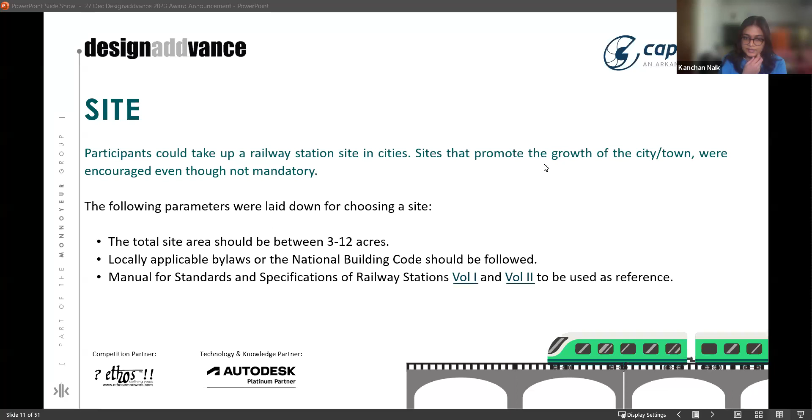The sites were supposed to be between 3 to 12 acres, and they had to follow locally applicable bylaws and the national building code. We had also suggested following the railway station's manual of standards and specifications, volume 1 and volume 2, as reference.

The eligibility for this competition was open to all undergraduate and postgraduate students of architecture, planning, engineering, and design. Even graduates from 2023 were eligible to participate. Many of you participated in teams of 3, some in pairs, and many students also took up the brief individually.

There were many workshops and lectures conducted for the participants free of cost online, which included lectures by experts in the field, whether it be software or design strategies, and case studies shown to students for inspiration.

There was also a lot of social media engagement. If you follow the handles at the rate Cape Tech or at the rate Ethos Empowers, many of these covers might already be identifiable to you. Some were value posts where we tried to tell you unique features you could add to your designs, or how transit-oriented development is practiced around the world, along with many short case studies to enhance your designs.

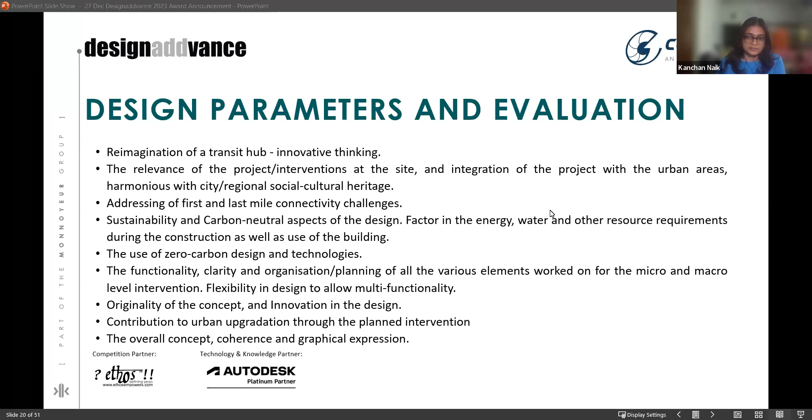These are our top 12 finalists, and we are as excited as you are to see who has made it to the top 5.

We'd like to especially mention the colleges who adopted the brief as a studio project, meaning they made it part of their academic curriculum in one of the most relevant semesters. We had around 12 colleges from different states and cities, including Birla Institute of Technology Mesra, IIT Kharagpur in their PG planning program, MES Pillai College of Architecture Panvel, NIT Hamirpur, NIT Raipur, and NIT Rourkela. We also had Sri University Cuttack, Rathinam School of Architecture Coimbatore, SRM Chennai, Thiagarajar College of Architecture Madurai, University Institute of Architecture Chandigarh, and VSSUT Burla take up the brief in their studios. We are really thankful to the teachers and HODs for showing interest in Design Advance and responsibly mentoring this program within their colleges.

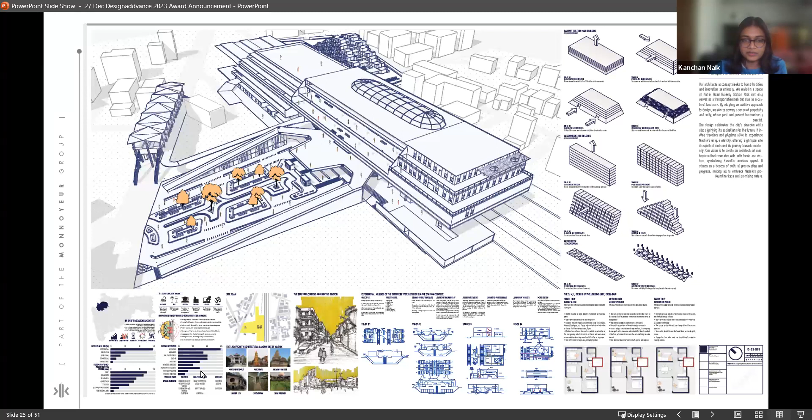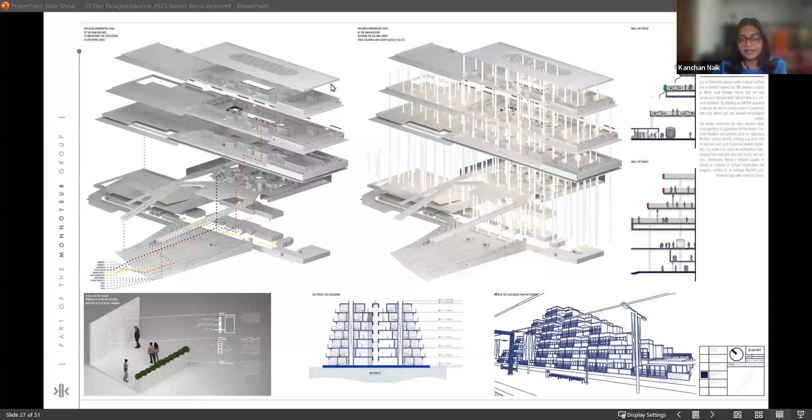Congratulations and many best wishes to this team. As you might have already heard, so many teams from Pillai College of Architecture have made it into the top 12. Congratulations to Kundan, Faisal and Nikhil for making it into the top 5. Congratulations again.

Now we move on to, we, yes, have Faisal from the team here. Okay. Hi. Can we allow them to talk? Yes, yes, Faisal.

Hi, hi. Actually, I have Nikhil here with me as well. Oh hi, that's great, ma'am. Congratulations, good work. Thank you, sir. Thank you so much. So would you like to say something?

Nothing. It's been a great journey overall. All the redos and everything else that we got in college, everything has finally paid off, and the immense amount of analysis and sketching, everything just feels worth it. I would like to really thank Capricorn, Ethos, Empowers, Design Advance for giving us this opportunity.

It's been really amazing, and we look forward to the next edition. Thank you so much, all the jurors, for being fair and for really giving importance to our design process. It's been really amazing. Thank you so much.

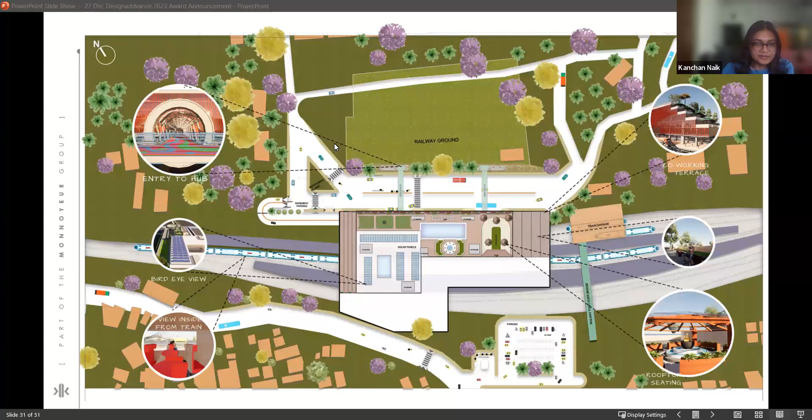There are co-working terraces, there is seating on the roof, there's the entry to the hub. Next slide, please.

You can see the scheme in detail here. Each and every layer has been explained thoroughly. They've very nicely and diligently broken down each function and resolved it to a great extent. They've also explained all the entries, the exits, the main focal points where people get in and get out, and what kind of urban design features they have incorporated.

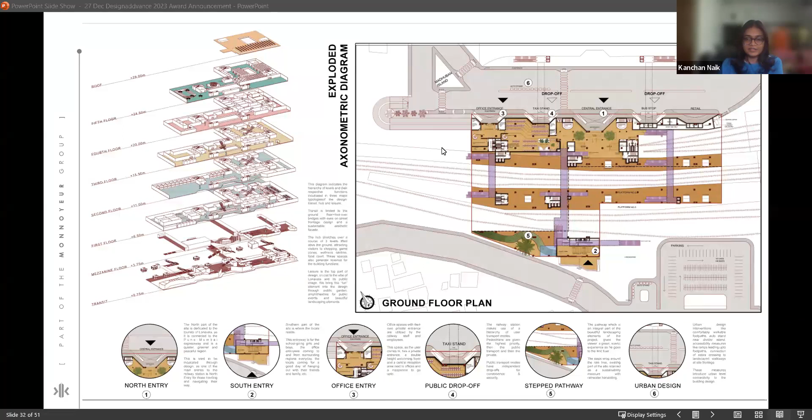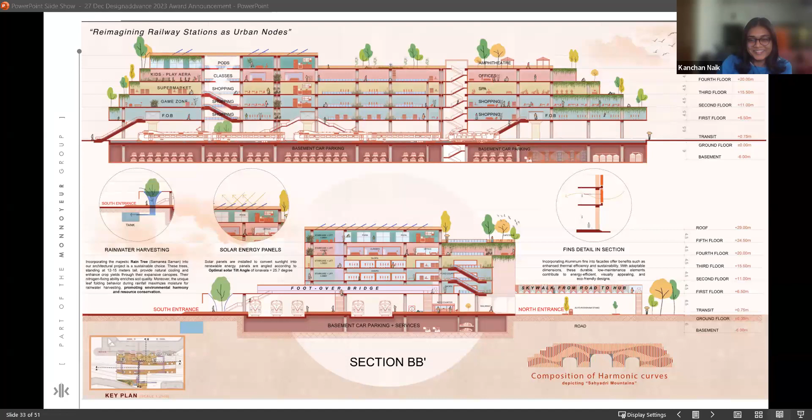Congratulations to Nidhi again, and we can see a section - Nidhi, Isha, and Sharvari. We can go back to the section slide, please. I think the team is here. Let's hear it from them. I think they'll be able to explain it much better than I am. Nidhi, Isha, and Sharvari, if any of you are here.

Three of them are here. Good work, congratulations. Thank you, sir. Thank you so much. Thank you, sir. Thank you, ma'am.

Thank you, Ethos and Design Advance and Capricorn for recognizing our work. This was a part of our semester project, and the whole process was stretched out with comments and discussions and the teamwork of the three of us, and our teachers. This was honestly a catharsis to work out the whole project and come up with the concept and everything. This was a very nice opportunity for us to work on, so thank you so much. We are really very grateful.

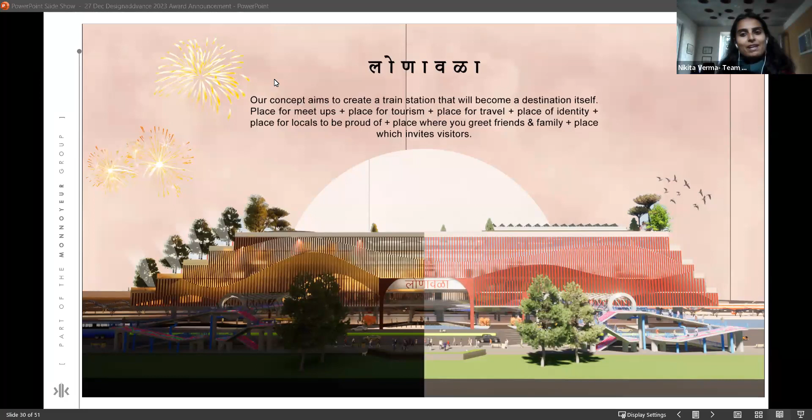All the best, team, very well done. Thank you, thank you. Thank you so much. Good work.

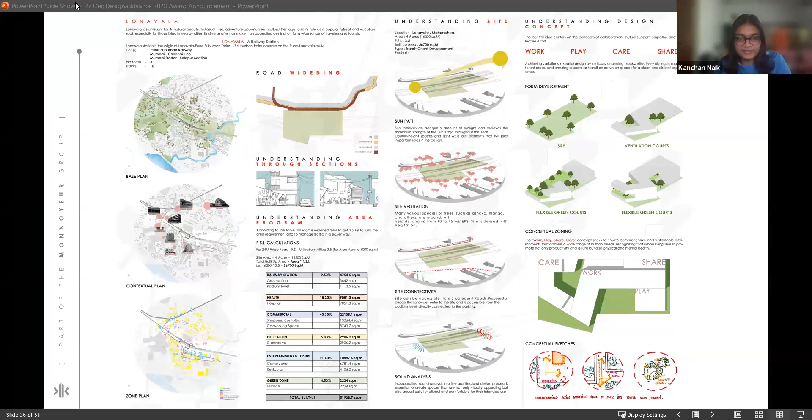Next slide, please. If any of you are here. Yeah, I can see Harsh and Prashansa. Yes, Harsh, Prashansa. If any of you can join us and take us through your entry, what you intended, we would like to hear it from you.

Hi, first of all, thank you so much for organizing this competition. It was such a lovely opportunity to take part in it and go through the process of designing. The basic concept was work, play, care, share, and we have designed the railway station at Lonavala. Looking at all the needs of the Lonavala station, we made an analysis of the surrounding, what was needed, and we came up with an area program, and accordingly we have designed the structure.

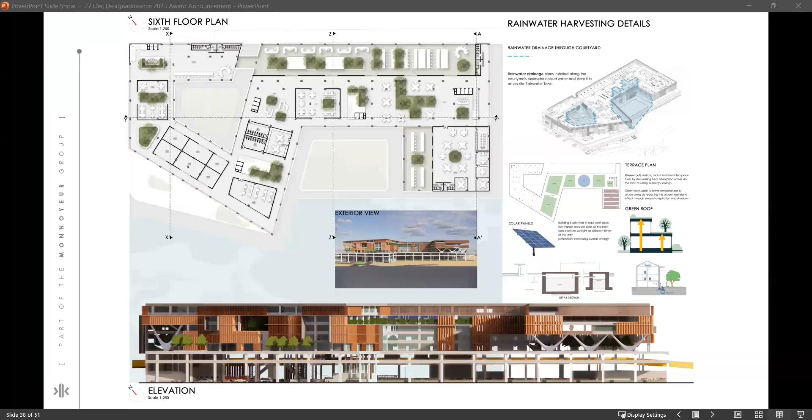Okay, the stakes are increasing. Who will be the second prize winner? We've come down to the first runner-up, and the participant who has emerged as the second prize winner is Riya Godambe from Rachana Sansad Academy of Architecture, Mumbai. Congratulations on winning the second prize, Riya.

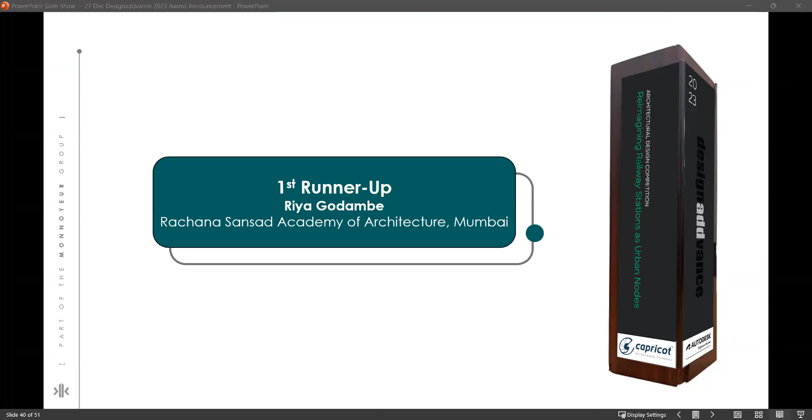She's worked on an inclusive city where architecture is a mechanism of inclusion in everyday spaces. She's treated her design as a mechanism to include people in every activity, and with the combination of activities, she's also made sure that every visitor feels welcome in the space, whether they are able-bodied or not, whether they belong to any user groups, they all feel welcome into the space.

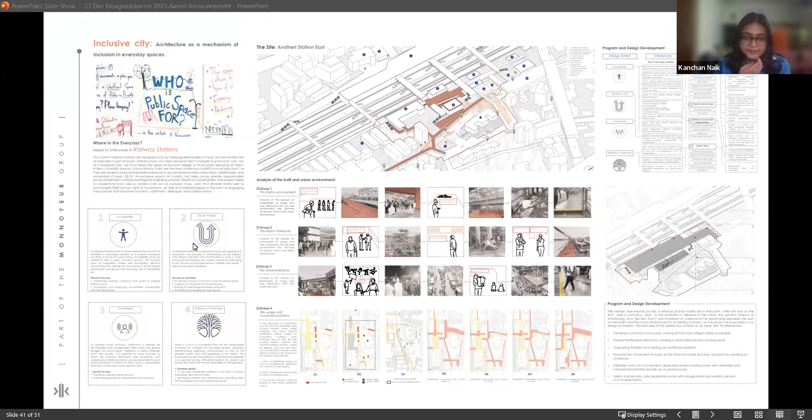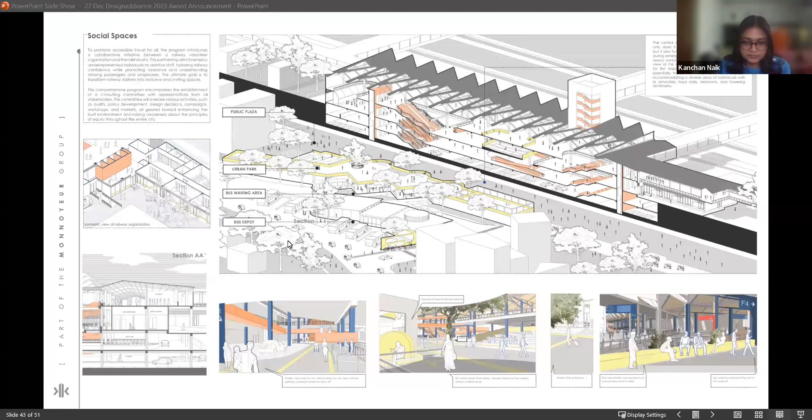How the vehicles are moving through the space, through the entry and exit points. What is this vehicular circulation working at a place of this scale? That is a very important thing to note and take care of. The modal interchange. Next slide please.

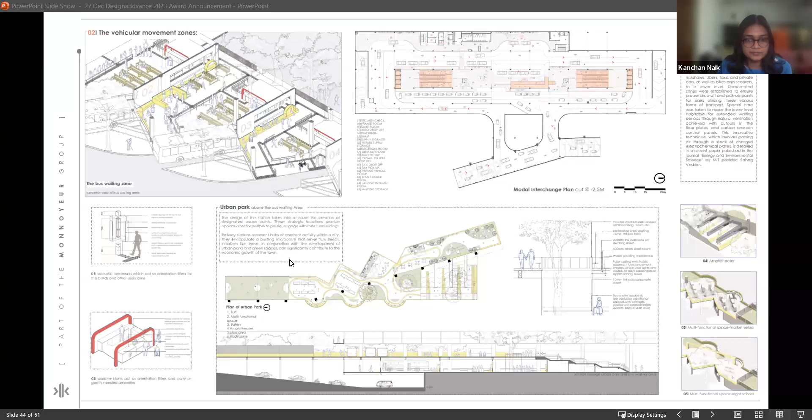So this is the moment that we've all been waiting for, the final winner of Designaddvance 2023. The first prize winner of this year's Designaddvance 2023 is none other than Liron Gonsalves from the Viva School of Architecture, Thane.

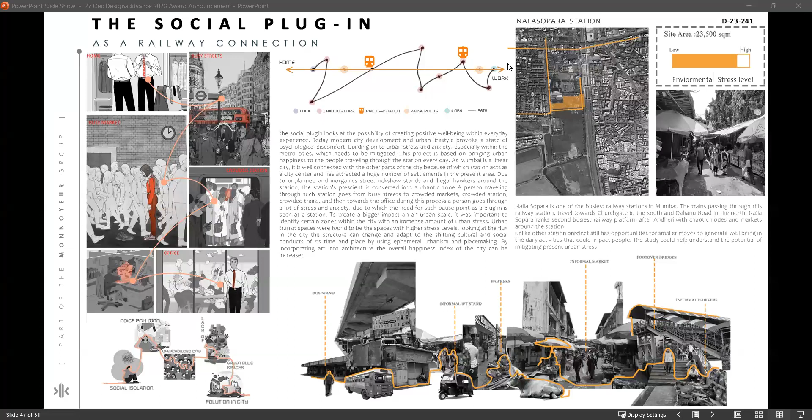So what this social plugin acts as is a pause point for commuters, so that they can relax and have some quality time near the station while traveling every day. What I had done is connect the Nalasopara railway station with two modules. These two modules can be attached together into one single module, or can act as two different individual modules.

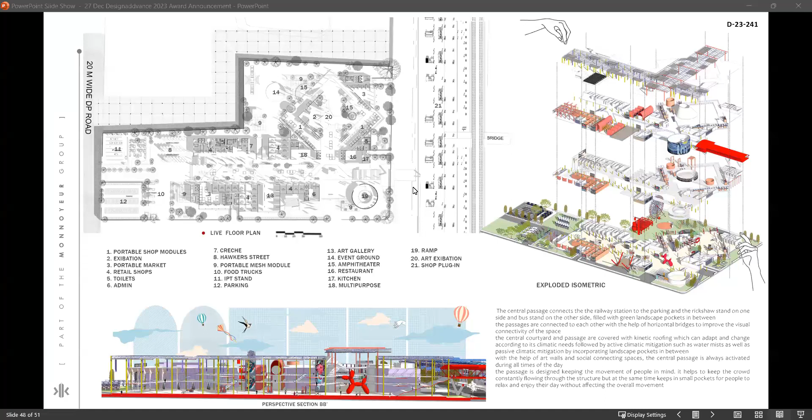So what I had done is use ephemeral urbanism, meaning that our city is in constant flux, so a permanent design can never sustain. Things always change. A station acts differently during different periods of time, the movement is different in the morning, evening, and afternoon. Keeping that in mind, I designed the whole thing where not just shops but different events can be held as well. I designed smaller modules which can be attached and connected to each other and used for different activities. For example, the hawker stall can be clubbed together and also act as a public sitting space. So the whole structure keeps on changing, the scenario is never the same, it always changes according to time and the events going on.

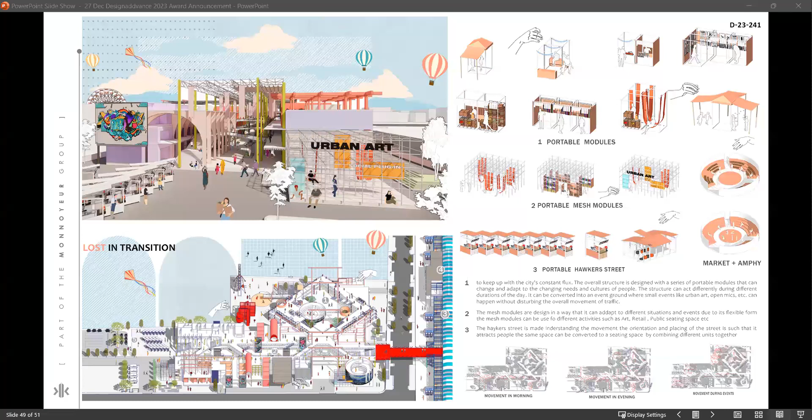The overall plugins I made were divided into two major categories: one was the social plugin, which was the overall site, and the other was the shop plugins. The main thing connecting every railway station is the skywalk, but while traveling I have never seen anyone using the skywalks. The reason is that shops and small hawkers are below the skywalk, not on it, so a person traveling always wants to go below to buy goods on the way home. Because of this, there was a lot of chaos below, a clash between vehicular and pedestrian movement.

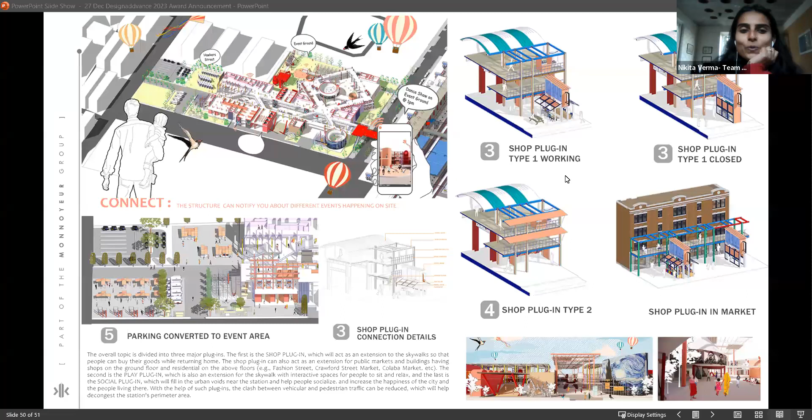Thanks for taking us through your entry, Liron. And it's not thanks to us, it's thanks to the jury members, and of course you, because you put in that effort and nice work which the jury thought fit well to be one of the winning entries of this competition, and hence you got the right evaluation. So there was no bias, of course. It's been a very democratic process, like architect Namrata was saying in the beginning. So over to her for final congratulatory words for all the winners announced today, and then over to Team Capricorn for closing the session.

Madam, you like to share some of your final words? Namrata, madam. Yeah, madam, unmute, yeah.

I would like to wish my congratulations to the winners and best wishes to the people who were very close. The reason is that for things like railway, metro, and transport, first of all we have to ensure that the train is running, the people are coming and the people are going, that is the first criteria. Thereafter there are other criteria as well. After ensuring the first criteria, you have to see what is the X factor or the design elements added by different people. This is the reason why the finalists were able to make it to the final list, and my wholehearted congratulations to them, that they continue the good work, and this will be helpful to them in their career when there are a lot of design competitions for winning contracts, architectural contracts going forward.